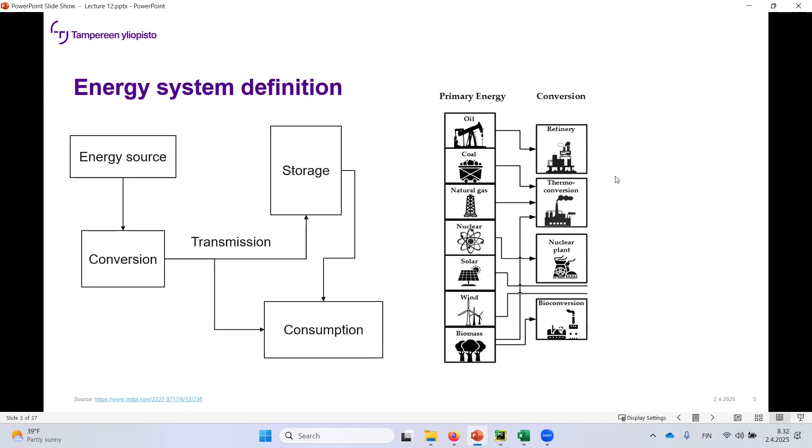In large-scale energy systems, you have the primary energy as fossil fuels, nuclear, solar, wind, and so forth, the biomass. You have the conversion plants, then the transmission and distribution, and the final energy is consumed by, for example, transportation, industrial sector, and residential.

So the overview of these key stakeholders in energy systems is that you firstly have the government and regulators. They are the ones to set the policies, give incentives to change the systems, and regulation related to carbon pricing or emission limits and so forth. That's the EU legislators and the national parties that adjust the laws and regulations.

Then you have the utilities and energy producers, the ones that provide the energy and also maintain the grid. So grid management, investment in renewables and market operations. They have to kind of take care of the system, uphold it in a way that, for example, Fingrid has a lot of this grid management, and the power plant or energy producers invest nowadays in a lot of these renewable power plants and so forth.

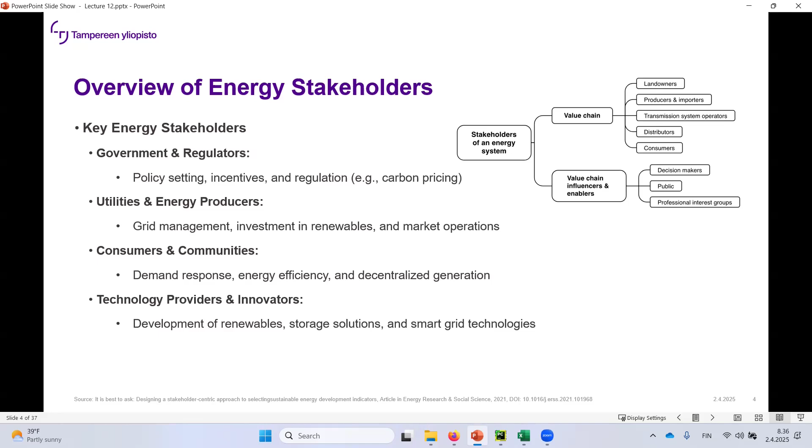There's also other ways to look at these stakeholders. For example, here is an example of taking into account how the value chain is related. So landowners are included here, consumers the same, distributors - these utilities and energy producers can be divided into different categories. There's transmission system operators, producers, and distributors as separate stakeholders, so you might get into a bit more detailed definitions through these value chains.

But if we look at this definition in a bit more thorough way - what's the role of government and regulators, for example, in the Finnish energy systems? The Energiavirasto and the Työ- ja elinkeinoministeriö, so the Ministry of Economic Affairs and Employment and the Energy Authority, they set policies, and the point of those policies is to balance economic growth with environmental targets.

So they have to be aware that we have long-running policies related to energy security, that we meet the demand, but also that we need to meet the environmental targets that are set by, for example, the EU. And they provide the incentives for increasing renewable energy sources, regulate market operations, and ensure energy security.

If we are investigating low renewable systems, these kinds of government parties and regulators have been focusing on maintaining stable supplies of traditional energy sources, so nuclear power and fossil fuels, and they have had well-established regulatory frameworks that have been supporting this centralized energy production.

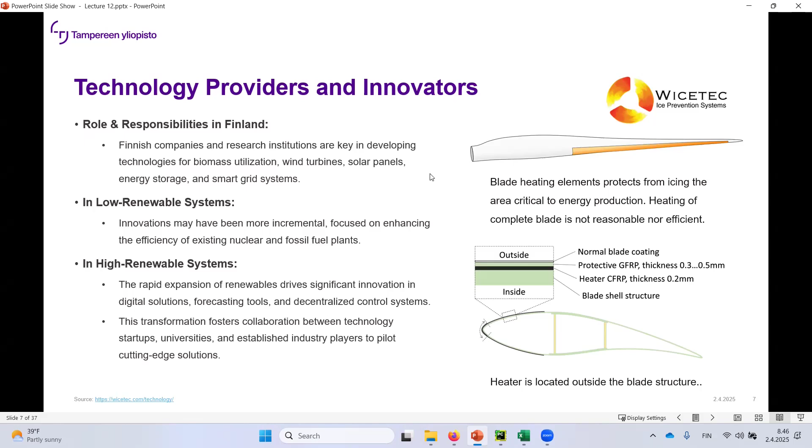Then there's the consumers and communities. In Finland, households and businesses are both energy consumers and increasingly so-called energy prosumers. A prosumer is kind of a previous consumer that has the ability to produce some of its own energy, and it can also provide it to the network as well, generating part of their own energy via rooftop solar or participating in demand response programs. We were talking about energy storage systems and these batteries that are being offered to Finnish households and these block houses.

And then there are larger energy communities, such as in Lempäälä. There's this larger energy community that, in case there was a kind of grid or system malfunction, could be to some extent at least self-sufficient. So they have battery energy storages, they have solar production, they have fuel cells, they have these gas engines, and there's a lot of infrastructure being built in Lempäälä related to this project. You can see it right around Idea Park, the solar fields, and we looked at the storage system in the lecture previously.

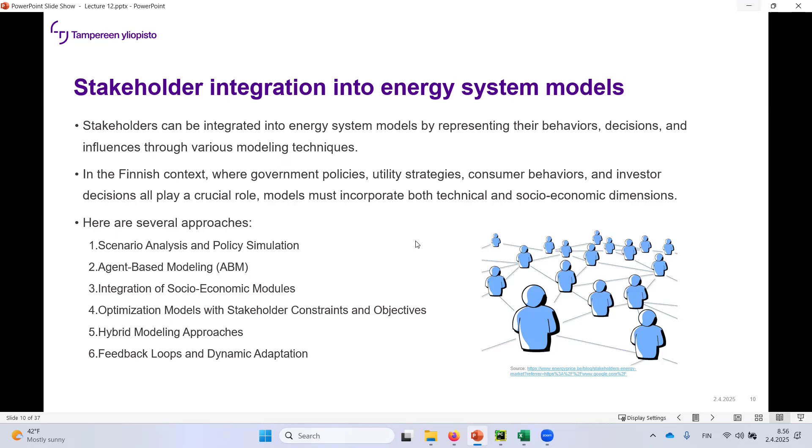Let's dive in and see what these actually mean. For scenario analysis and policy simulation, you can define multiple scenarios representing different policy choices. There can also be different regulatory frameworks and market conditions taken into consideration.

I promised module assignment 4 would be released already, but I've been having a lot of trouble generating a meaningful assignment for you. I'm thinking it might be related to this - there's a way of making different kinds of scenarios.

You can calculate how these scenarios affect the convergence of the energy system. By convergence, I mean that we are heading towards something, and what that something is going to be can be modeled. For example, a Markov chain can be applied here.

You'll have to determine a Markov chain matrix. The numbers behind it you can arbitrarily drop, as I've made in my example, but there's also something behind those numbers that you have to determine.

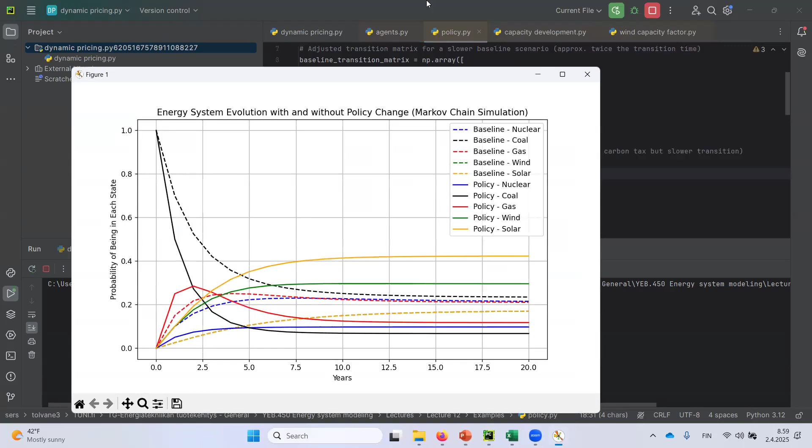All of these can be given a probability value, and this represents a certain kind of system, whereas if there's going to be a higher push towards renewable energy, we're going to emphasize more of these transfers towards renewable energy sources. If I run this scenario, it's going to give me a figure on how the energy production portfolio is going to develop.

This was a dummy calculation where we had 100% coal in the beginning.

And what's going to happen based on the two different scenarios, this baseline is going to converge into a certain level, whereas the higher renewable push is going to drive it downwards.

Since my background is in modeling chemical kinetics, this looks a bit like intermediate products from chemical kinetics calculations. So there's a certain species that peaks up as a kind of an intermediate product, so the gas power in this strongly policy-driven system peaks up high, but then it starts decreasing again.

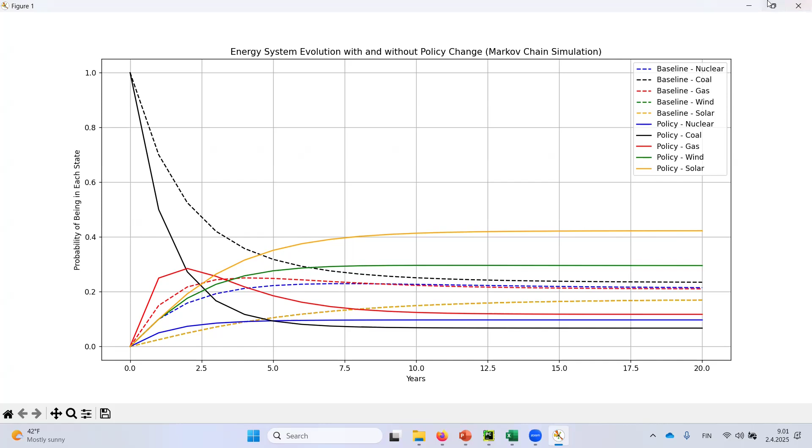So with these kinds of scenarios or with this Markov chain, you can analyze to some extent where the system is going, but the difficulty lies in determining these numbers.

So you have to be able to resolve the interdependencies of these various energy sources, and this is going to be somewhat on a general level. You cannot say it as with an accuracy of one single power plant, for example, it has to be on a general level. But there can be these trends that you can derive from the historical values and also the policy targets that are being set. So this kind of scenario analysis can be utilized to incorporate these policies.

So for Finland, you might simulate scenarios where the government introduces dynamic pricing, increased renewable subsidies, or stricter emission standards. And for example, to some extent you did this in module assignment 2, where I said Finland is acting as an island, and you had to make decisions on what energy sources to emphasize.

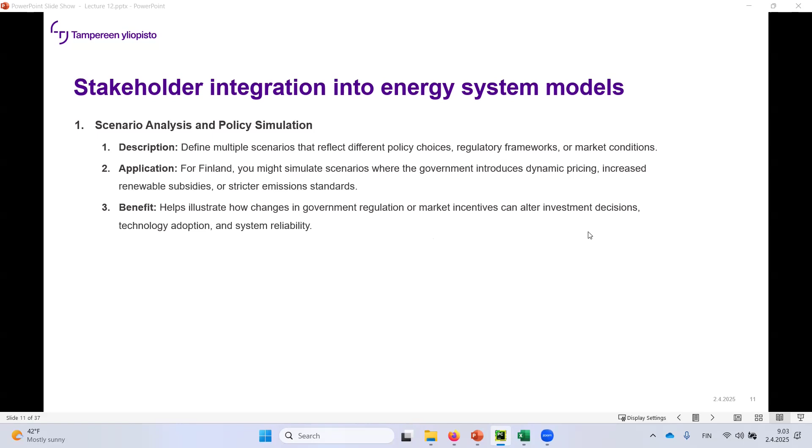Agent-based modeling. This models individual stakeholders, utilities, consumers, investors, as agents with distinct decision rules and interactions. So the interaction is the key in here. How do they interact? In a Finnish energy model, utilities could be modeled as agents optimizing grid operations under different renewable output, and consumers might be modeled to respond to real-time pricing signals.

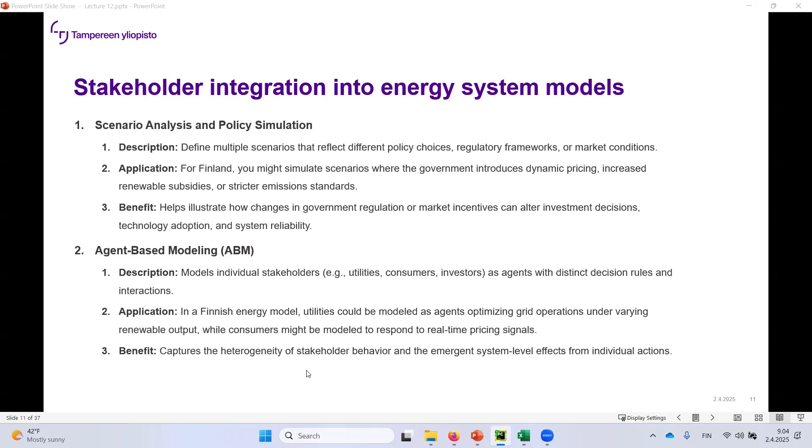So, for example, this pörssisähkö - when the price changes, the consumers respond. And this kind of modeling approach, when you have these agents, it captures the heterogeneity of stakeholder behavior and the emergent system-level effects from these individual actions.

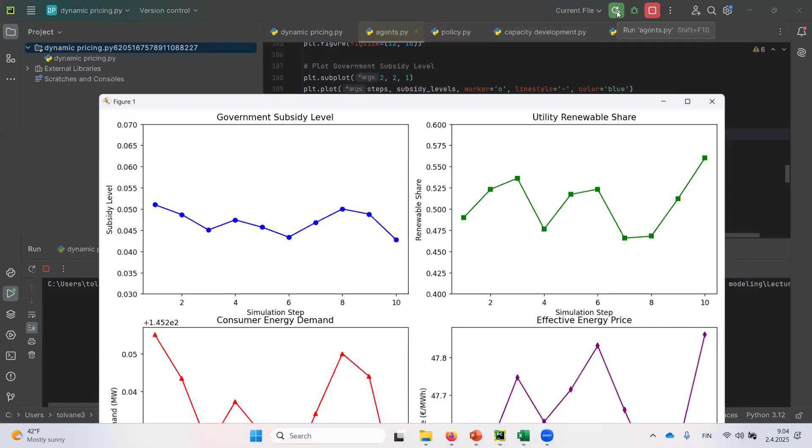And there is some kind of an agent-based model that I tried to generate as an example. So in here, what I have is a system where there's government, there's the utility, and then there's the consumers. The electricity price is the one that affects the consumers. The government regulates the subsidy levels, which to some extent affects the price and also the renewable share.

There's also some randomness in the utility renewable share, but whenever the government sees that the utility renewable share goes up, they are going to decrease the incentive. That's how the market works. But in this scenario there's multiple different calculation steps, so it kind of shows how these subsidies fluctuate. And to some extent this is actually what has happened in Finnish energy markets - at least in the last decade, there was some kind of bouncing action in the subsidy systems.

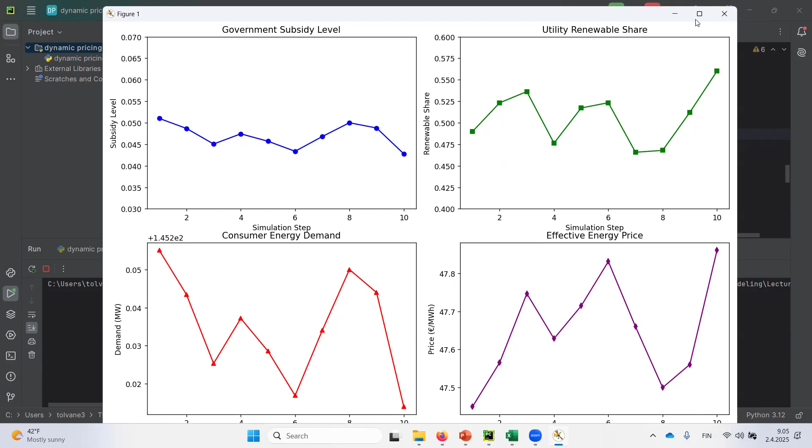And the consumers, whenever they see a higher energy price, they are going to decrease their consumption to some extent. But again, this is a rather arbitrary example.

And then there's the kind of interlinked interactions. So the government towards utility adjusts the subsidies, utilities to consumers provide the energy, government to consumer influences these prices through the subsidies, and utility to government reports the renewable share, so the government can make decisions based on the renewable share. So all of these agents have their own distinct behavior and effect on the energy system, and that's their interaction. I'm always trying to make these examples in a way that you could understand within the context and time frame of this lecture.

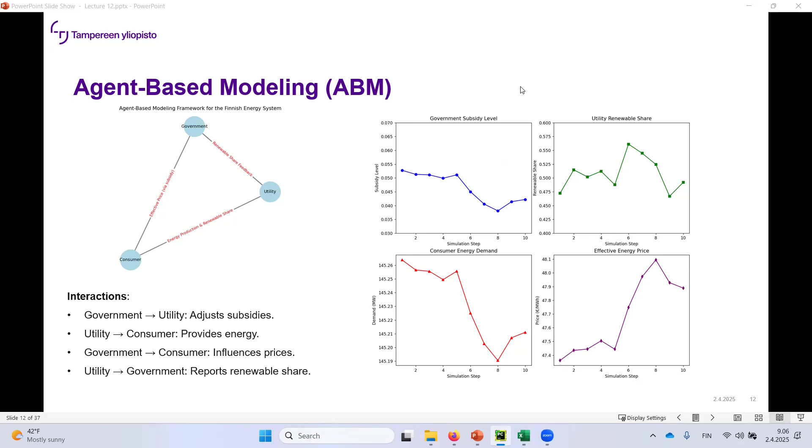So this isn't per se a very complicated example. The real agent-based models utilized in these energy system studies are much more complex, but this is just an example of that.

So, more stakeholder integration into energy system models - integration of socio-economic modules. You could couple technical models, so optimization or simulation models, with socio-economic components that account for example for market behavior, investment risks, and policy impacts. And in Finland this might involve integrating models of consumer demand response and investment decision frameworks for renewable projects. This has been done in the context of Finland.

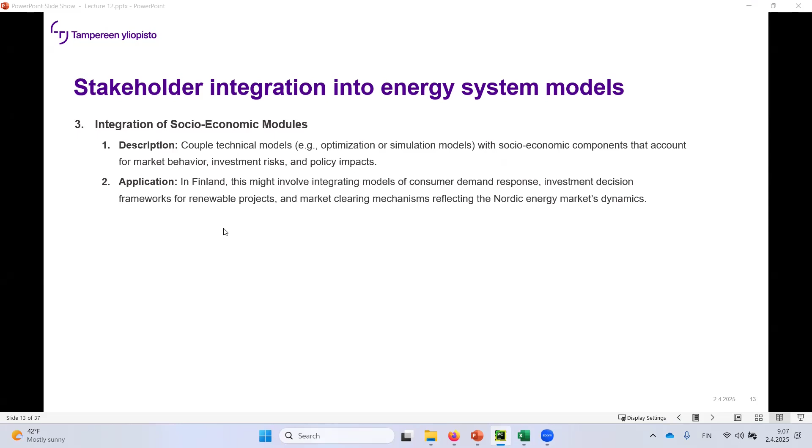And market clearing mechanisms reflecting the Nordic energy markets dynamics. This would provide a holistic view by linking technical performance with economic and behavioral factors.

Then there are optimization models with stakeholder constraints and objectives. Developing optimization frameworks where stakeholder objectives, such as minimizing costs, reducing emissions, or maximizing renewable share, are explicitly included as constraints. To some extent, we did this in the Excel exercise that I provided you with.

We did the Monte Carlo simulation to determine the battery size for the system. We minimized the usage of fossil fuels by introducing a battery into the so-called microgrid system earlier in this course.

For example, this optimization model for grid operation in Finland could include constraints on regulatory limits on emissions, incentive mechanisms for renewable energy, such as I showed in the agent-based modeling -- there's a subsidy that increases when the renewable energy share decreases -- or contractual obligations with consumers, where they have to be able to provide a certain amount of renewable energy to the consumers. Actually, energy companies have made this kind of contract with customers.

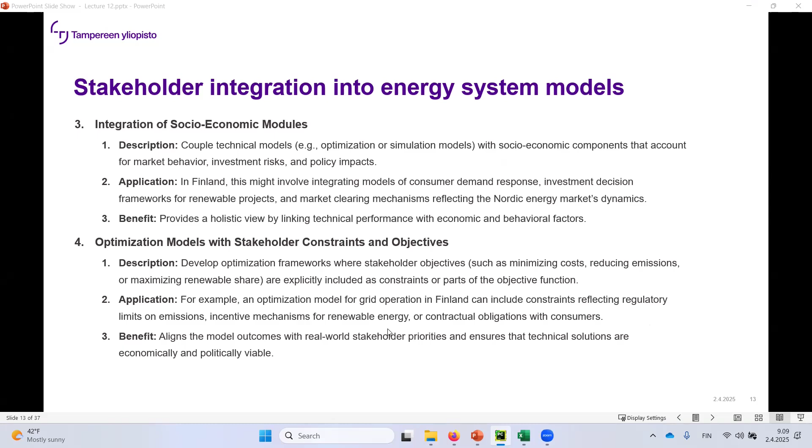What else? Hybrid modeling approaches combine deterministic simulation models with probabilistic elements that reflect uncertainties in stakeholder behavior, such as in market prices or consumer demand patterns. This consumer demand pattern is something we also modeled before, so you are somewhat familiar with this. An application of this could be using Monte Carlo simulation to incorporate uncertainties like fluctuating renewable output.

To some extent I guess we did this, but I'm still going to emphasize it one more time. In the exercises I want to utilize this Markov chain for wind power -- the wind capacity factor. There's an example of what I managed to do.

I first did it in Python, but then it looked like a black box again that you might not understand. But for wind, if you have the wind profile for a certain area, which you can get for example from the Copernicus database, now you have the skills to use that.

This Markov chain classifies the behavior of the wind, because if you want to make Monte Carlo simulations of wind production, you don't just want to make random numbers, because that's not how wind behaves. This Markov chain enables you to characterize the behavior based on changes in wind velocity.

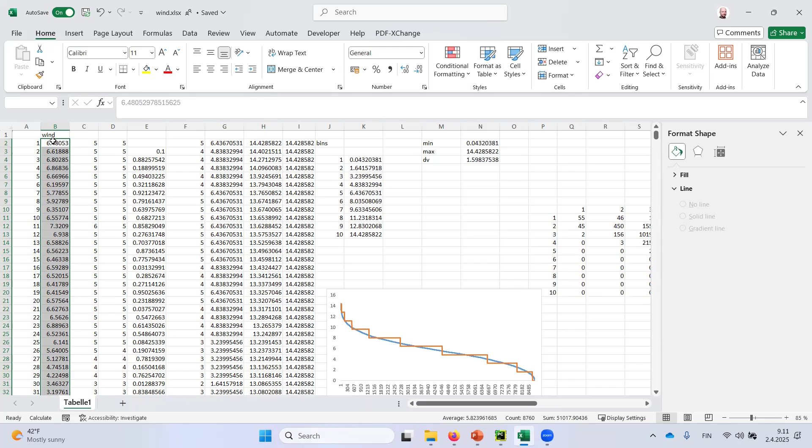Now we have an hourly resolution. So what I have done here is classify different classes of wind speed from minimum to maximum -- these are the different classes. Then I can say, oh, this is wind class number 5, and the next one is wind class number 5, so it stays the same. Here you can see from 5 to 6, and 6 to 5. So those are the possible changes.

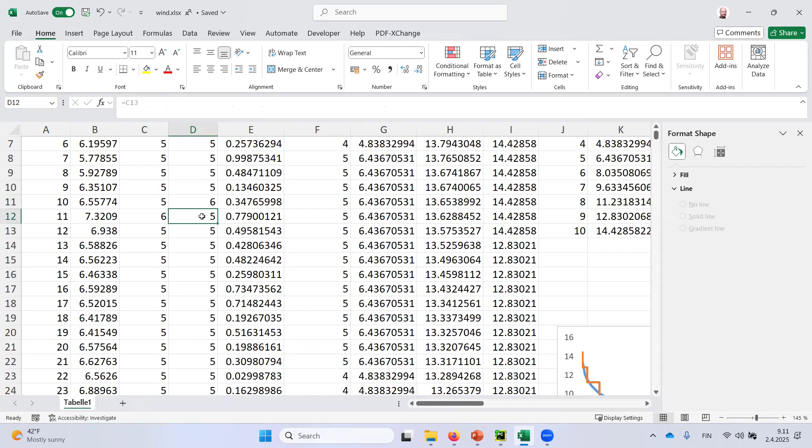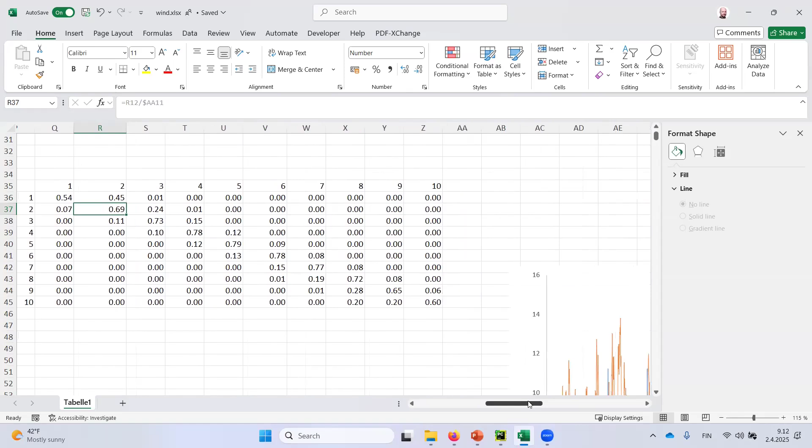So this Markov matrix enables you to see, for example, what is the probability of wind velocity class number 2 staying as class number 2 -- 69%. To move to class number 1 -- 7%. And to move, for example, to class number 7, making a crazy jump -- 0%. Now when I have this behavioral matrix, I can use this Markov chain to produce a novel wind profile.

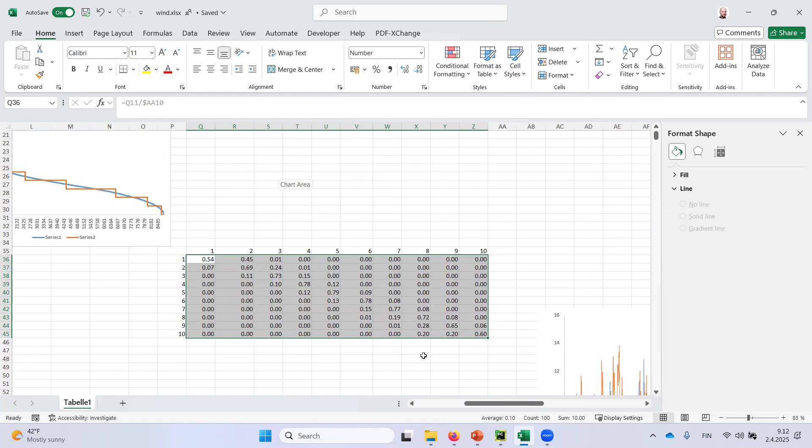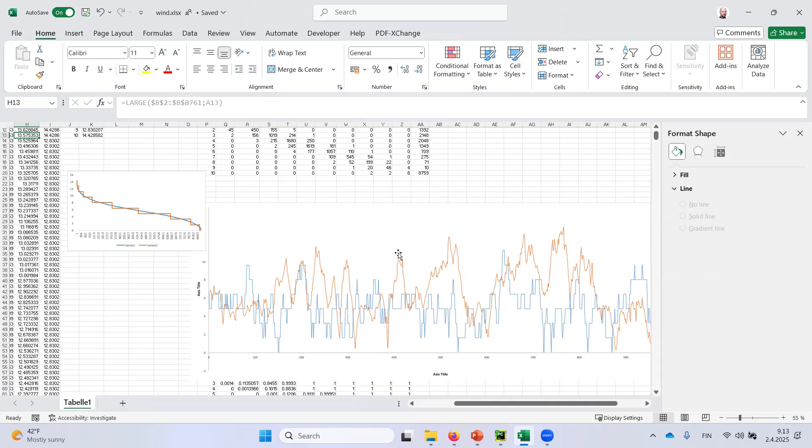You can see the colors are in reverse here -- the orange is the real wind, and you can see these discrete changes. I'm going to zoom in here a bit so you can see there's a fluctuation in the wind. Whenever I do this kind of randomization again, let's see if I can get it to work.

Now you see the profile changes. I have an infinite amount of profiles that really closely resemble the load duration curve. Now you can see the different classes because I have 10 classes. I made the load duration curve based on the Markov chain.

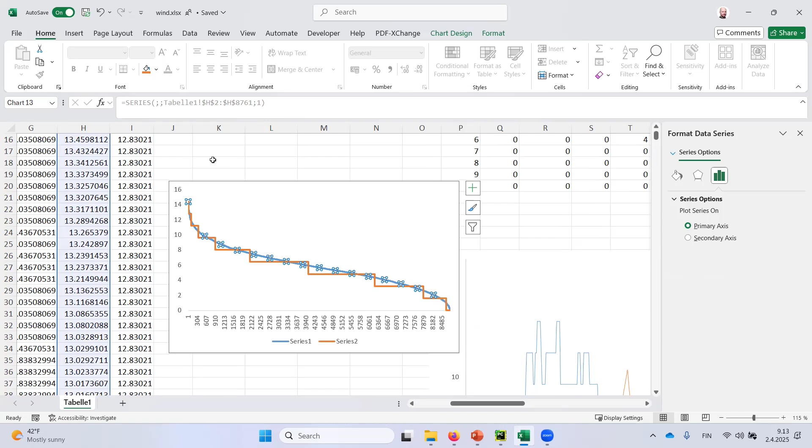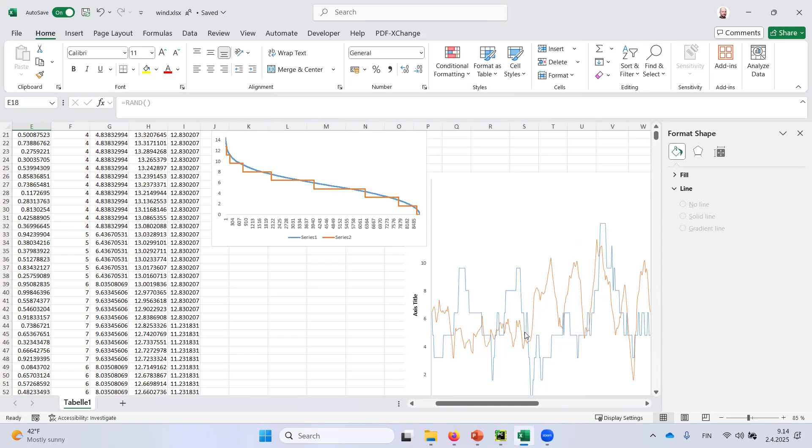Generated wind profile, so that's the blue one here. The colors are reversed here, and this is the actual one. So now you can see we have wind profiles that really well characterize what's happening in the real world, but there's a possibility of making time series that provide wind at certain times where in reality there wouldn't be wind, and vice versa.

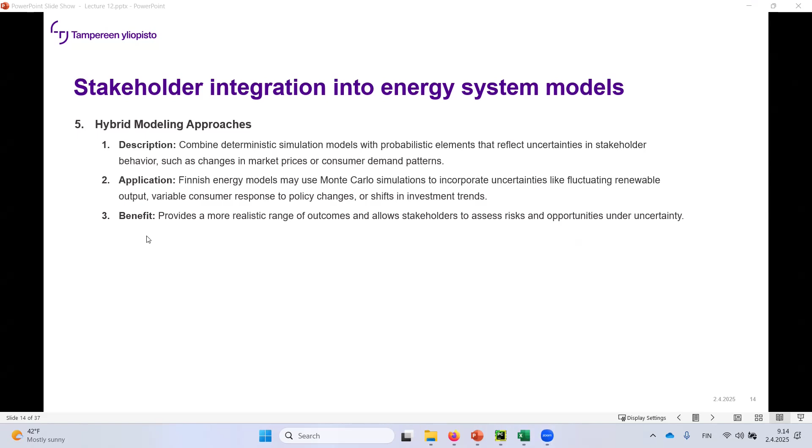So that's about the hybrid model approaches, and then there are these feedback loops and dynamic adaptation, implementation of dynamic feedback mechanisms where stakeholder decisions affect system performance. I think this was seen to some extent in the agent-based modeling, where there are feedback mechanisms where utilities report their renewable amount, and one stakeholder, the government, adjusts subsidies based on that. So to some extent you've been using these different stakeholder integration methods, but it's beneficial to categorize them also.

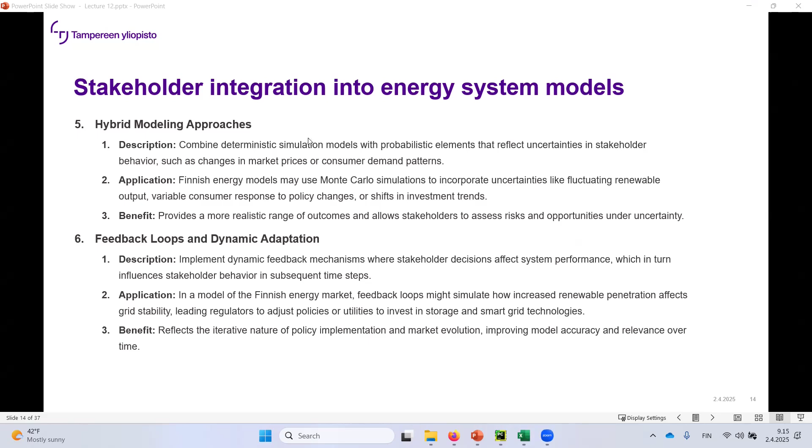So what kind of control measures are being used in energy systems? There are market mechanisms. These control measures and market mechanisms are the two components in the management and optimization of energy systems nowadays, and they have to work together to make the grid stable, reliable, and economically efficient.

That's the trilemma of energy systems. You could make it reliable, you could make it cheap, you could make it environmentally friendly, and you can only choose two of those. So how do you balance between those three?

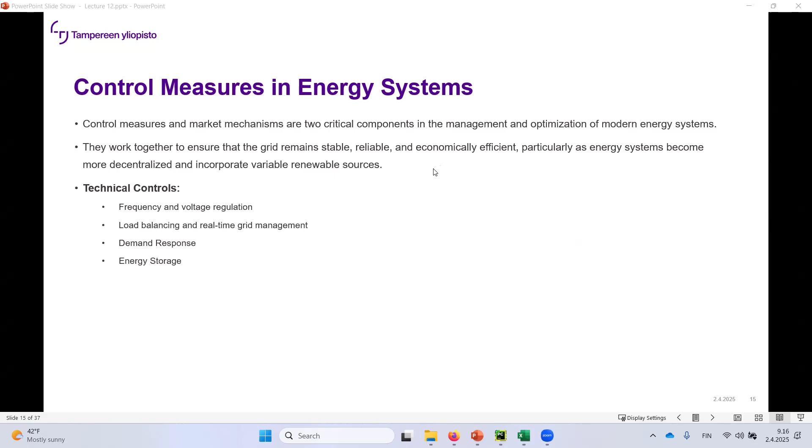What kind of control measures can be utilized? There are technical controls and market and regulatory controls. Technical controls, for example, relate to frequency and voltage regulation in the electricity grid. You can have such technical controls for the district heating system, and for gas transmission networks, but they aren't related to frequency and voltage regulation—they have their own characteristics.

For example, you can think of energy storages as a technical control measure, and demand response. Market and regulatory controls include dynamic pricing and time-of-use tariffs—in essence this could just be pörssisähkö, the market priced electricity. There are also capacity markets, auxiliary and ancillary service markets, subsidies, incentives, taxation, and integration with energy storage and demand response.

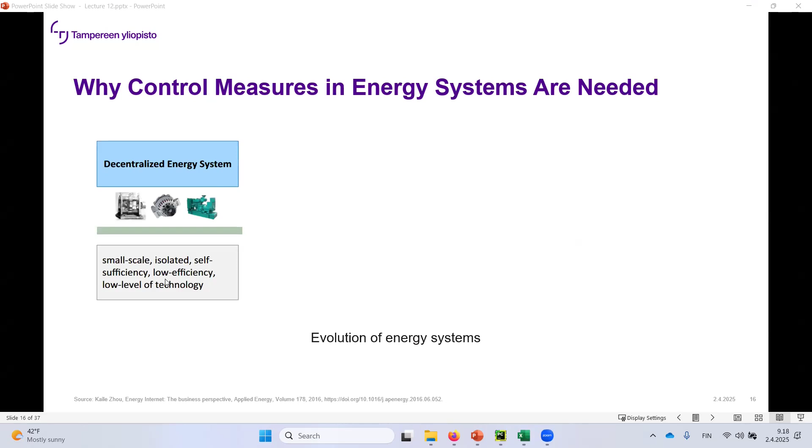These control measures in energy systems are needed because we are moving from early decentralized systems—small scale, isolated, self-sufficient, low efficiency, low level technology—which was around the 19th and early 20th century, toward a centralized energy system with highly industrialized production at a larger scale, and then toward a distributed energy system.

That's what's been happening now: diversified, small range, renewable, clean, flexible, low emissions. But what we need to move towards further is the smart and controlled energy system—smart, interconnected, which is where sectoral integration comes into play, digitalized, data-rich, with the Internet of Things and big data, or as I like to call it, big and messy data, and high efficiency.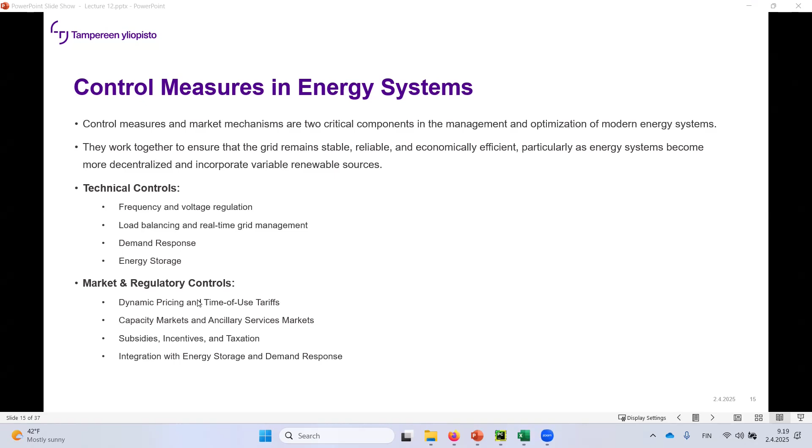Personalized—that's why we need technical controls and market and regulatory controls, because we're moving towards a system that's highly, let's not say chaotic, but that's what it would become without control measures. Technical control measures are real-time measures that help maintain the balance between supply and demand in the electricity network. Frequency regulation ensures that the frequency, 50 hertz, stays within the wanted limits, plus or minus 0.1 hertz.

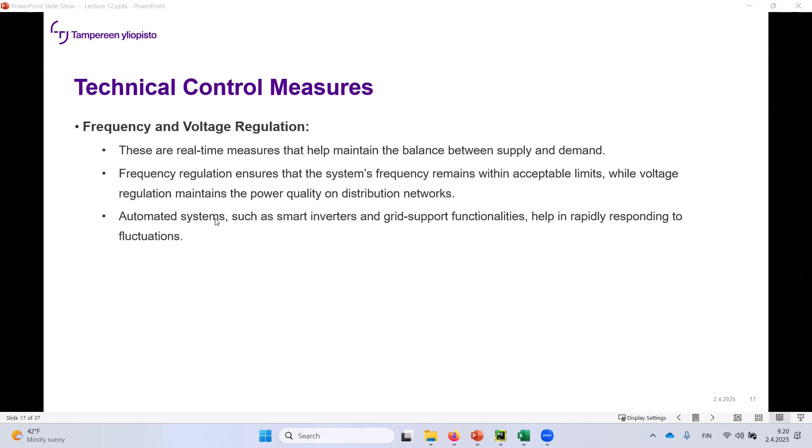These are automated systems, and there's legislation and regulation concerning frequency and voltage regulation. Then there's the load balancing and real-time grid management, so grid operators use this control system.

I put a link to this SCADA system, so you can see what it means - supervisory control and data acquisition. A key attribute of SCADA is its ability to perform supervisory operations over a variety of proprietary devices, with certain levels this system can go through.

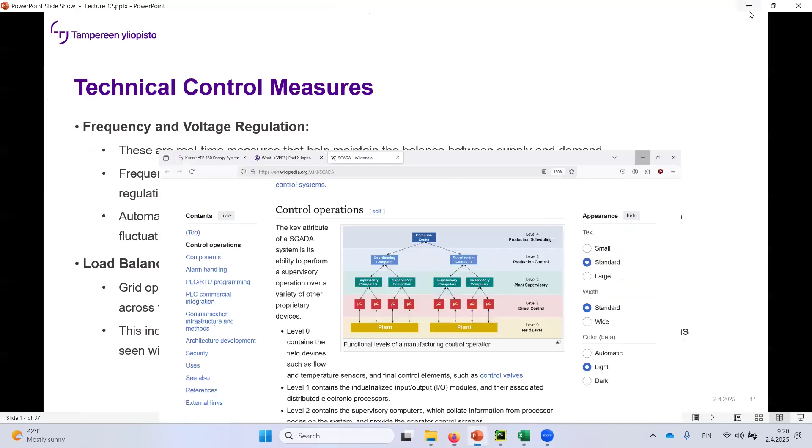This includes managing these kinds of ramp rates of power plants in the electricity system to respond to sudden changes in demand or supply.

I'm talking mainly about the electricity system here because in this smart and connected energy system, the heart of it is the electricity system, because that's the fastest one to respond. There's the largest amount of data, and it has to maintain balance, unlike at a second level, such as the distributed or district heating systems.

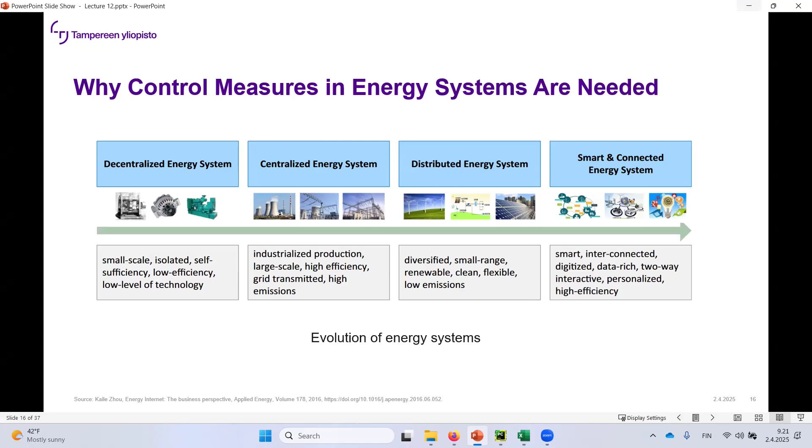District heating systems are isolated from one another, but electricity systems are highly interconnected, and they have the highest need for resolution in terms of balancing it out. That's why we have a lot of these mechanisms related to control in the electricity system.

These are the reserve marketplaces in Finland and what they do. There's, for example, fast frequency reserve, which responds in seconds. Then there's the minute scale, 5-minute scale, and 15-minute scale kinds of restoration services in the grid.

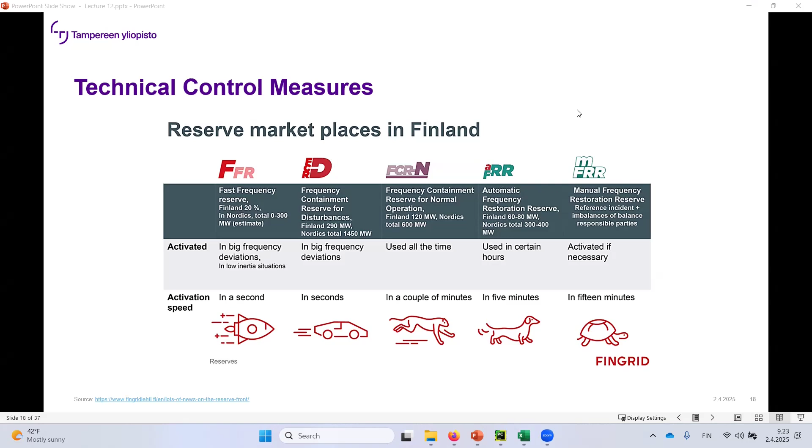So there's a lot of these reserve marketplaces, and they have been increasingly utilized in or examined in master's theses nowadays - how to make profit out of this. If we have a system, can it operate under these markets and get possible revenue out of it?

These demand response programs allow consumers to adjust their electricity usage in response to grid conditions or price signals, and this can be done in an automated way. The electricity company can provide a service in which they control, for example, certain parts of your heating system and so forth. Automated systems or manual interventions can reduce consumption temporarily.

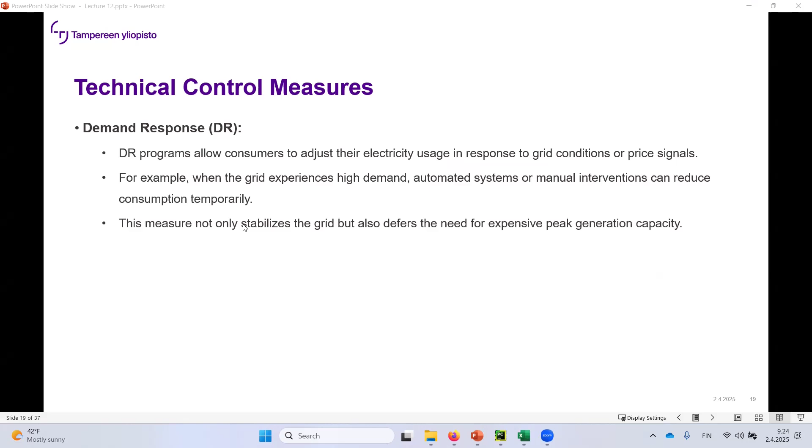Then there's energy storage as a control tool - something you're more familiar with since we already had the lecture on this. Storage systems can absorb excess energy during low demand periods and release it during high demand periods.

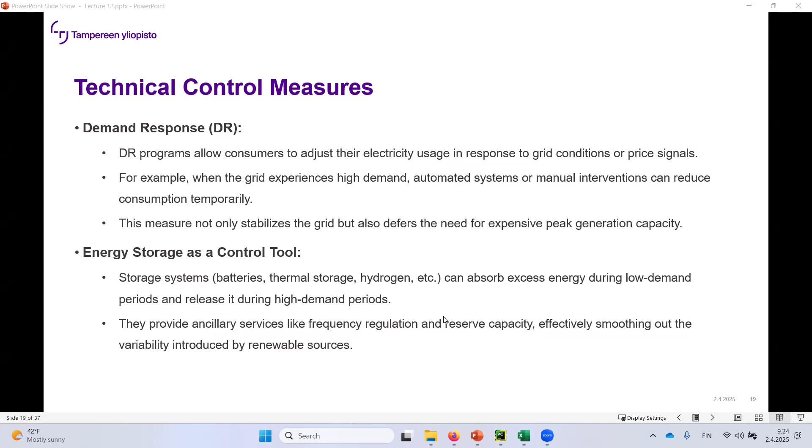So there's a lot of different services that can be utilized to balance this network. When talking about demand response to customers, for example, Helen provides this kind of service - you can go into this website to see.

Okay, there seems to be a lot of trouble with this Zoom system now. Just going to check that my recording is on. Yeah, sorry for the trouble, I'm not sure why this wants to quit all the time.

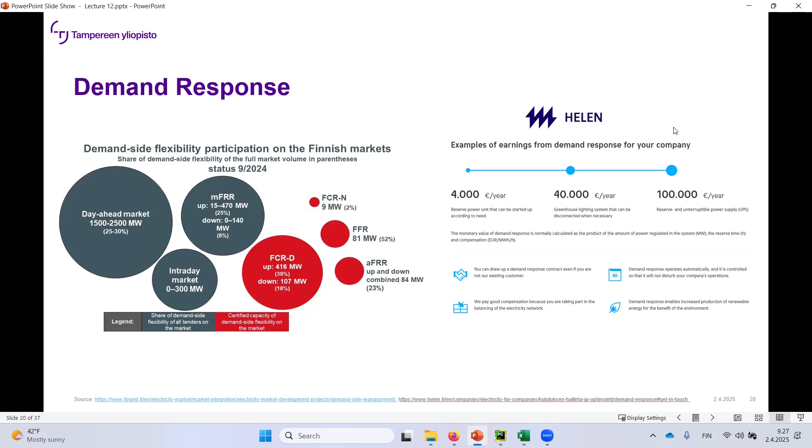Then there is this dynamic pricing, and this was a bit of a pickle since a lot of the literature referred to this dynamic pricing as being the same as time of use tariffs. But the way I understand it, time of use tariffs means, for example, this pörssisähkö, the market price-based electricity contract, so you know the prices in advance. But there might be some difference between the consumption prediction for tomorrow and the realized consumption of tomorrow, so that's why the price of production actually changes.

If there were some mechanism so consumers could see the real-time price, they would be able to adjust their systems accordingly, or it would have to be done automatically. Otherwise it would be a really up and down bouncing system. So we'll see an example of these dynamic prices, which incentivize consumers to shift their usage to off-peak times, especially when the prediction of consumption and production goes wrong, for example in the case of wind power.

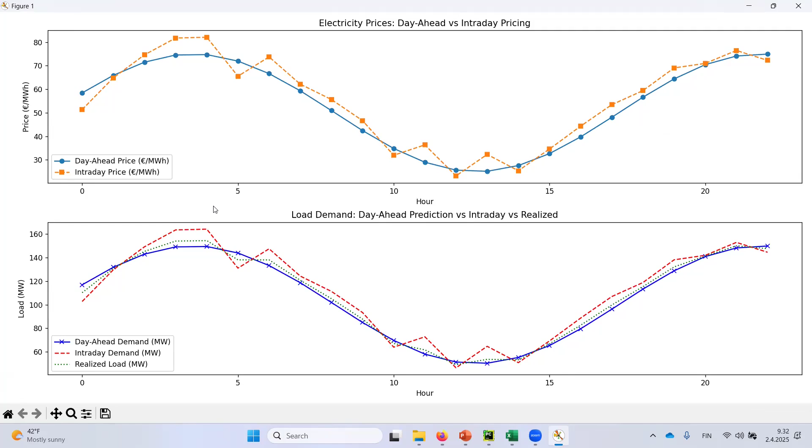Based on this load profile there's also the price profile - less consumption, less price. But now since there is fluctuation in the demand, it causes fluctuation in the marginal price of production. Due to this dynamic pricing, some of the customers will adjust their consumption based on the actual current price, which will drive this red curve towards the blue one - that's the green curve in here. So it levels out the fluctuations.

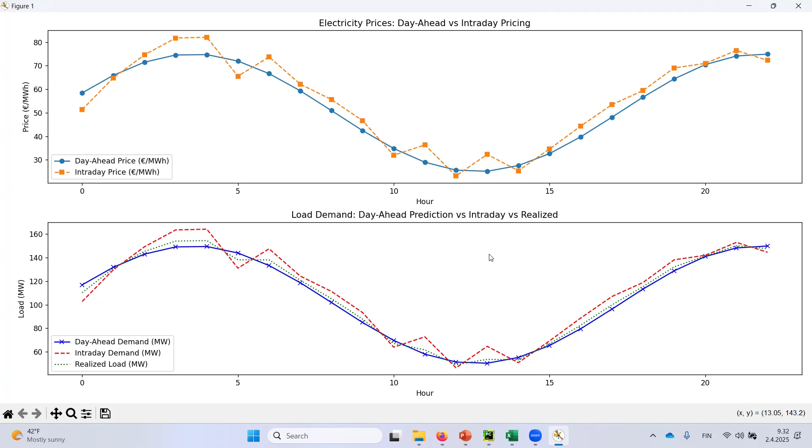But that's not a system that's being offered now, and it would have to be automated in a sense, otherwise it would be really chaotic. So that's dynamic pricing and time of use tariffs.

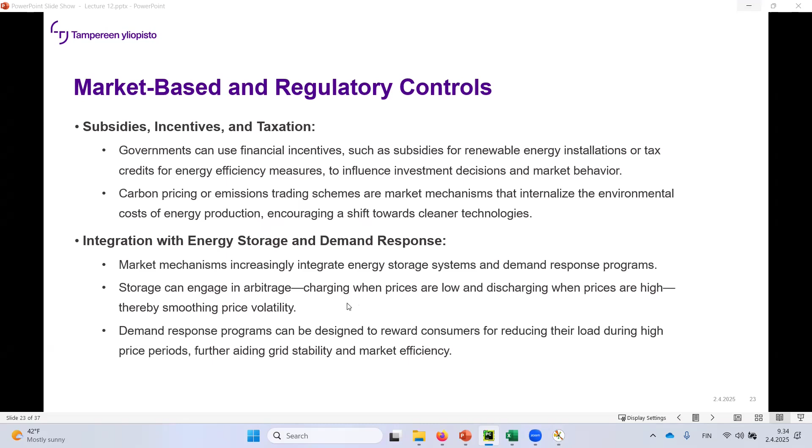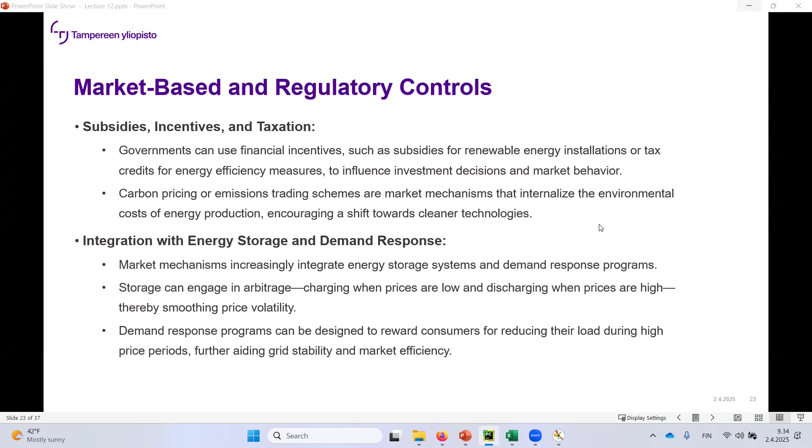Then for market-based and regulatory controls, one aspect is subsidies and incentives, taxation. Governments and EU legislators can use financial incentives such as subsidies for renewable energy installation or tax credits for energy efficiency measures, to influence investment decisions and market behavior. Then there's integration with energy storage and demand response, which you're more familiar with - the arbitrage, where you load up the energy storage system when there's a low price and utilize it when there's a high price. That levels out the system's fluctuation in terms of both demand, consumption, and price.

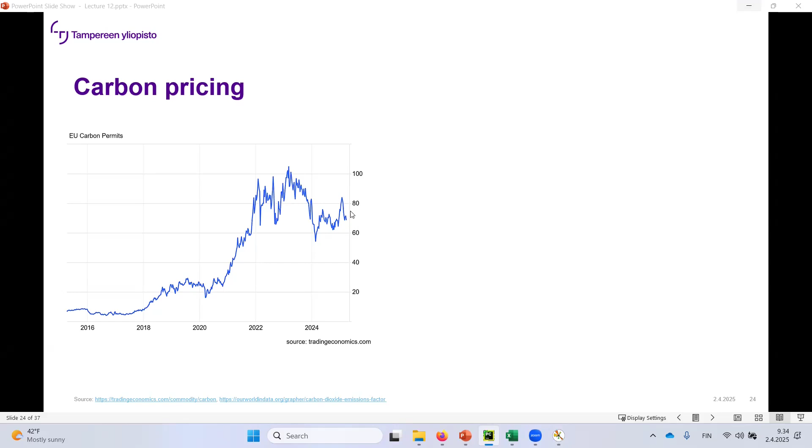Related to this taxation, you have carbon pricing. The CO2 price has gone soaring upwards during the early 2020s, and now it's been fluctuating at a level of approximately 70 to 75 euros per ton of CO2. Then there are the carbon dioxide emission factors that, in cooperation with this carbon pricing, are set for certain fuels - they drive the system away from these highly carbon dioxide intensive production methods or fuels.

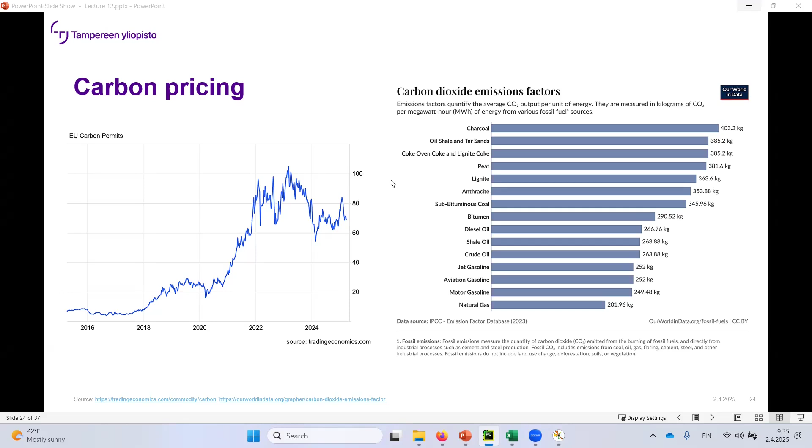So you can see that natural gas most likely is going to be, or would have been, the kind of intermediate solution for our energy system decarbonization. But due to the ongoing war, the future of natural gas is a bit unsure.

And then the incentives, what kind of incentives have been put into place? In essence, for example, in the Markov chain matrix, in this policy, you would have to adjust these. How likely is it that coal will be replaced with wind? Well, it's going to be much more likely if you have incentives.

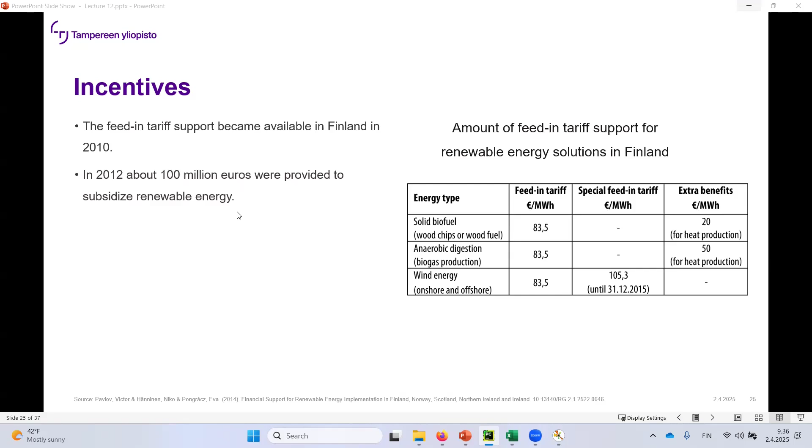And that was the kind of initial path of this Finnish wind power generation or evolution. So this feed-in tariff became available in Finland in 2010, and approximately 100 million euros were provided to subsidize renewable energy: solid biofuel, so wood chips and wood fuel, anaerobic digestion related to biogas production, and wind energy. This was the one that started growing the fastest, making it profitable for this novel type of renewable power source to break through into the markets.

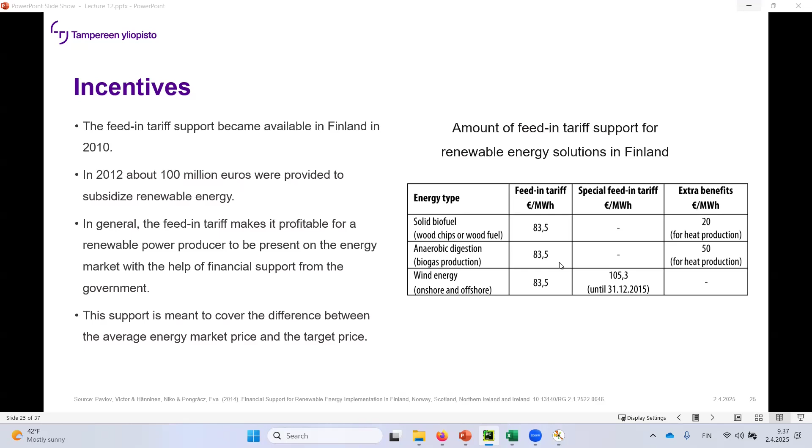But then in 2017, the system was full, at around 2,500 megawatts. Part of them are still receiving this support, so feed-in tariff is still active in Finland, but there are no new participants that can enter the system, at least in terms of wind power. If there's some novel new system, for example hydrogen production, in the future it might get some incentives as well.

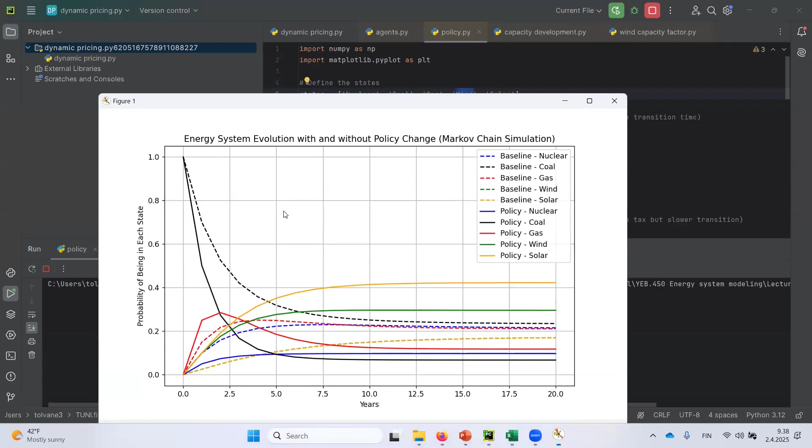While these technical control measures operate in real time to manage grid stability, market mechanisms provide longer term economic signals. Demand response would be a way to balance the system within 15 minutes or within the hour, but market mechanisms are something you have to go through to see what happens to the system in the long run, in 20 years, where it's going to level off to. Those numbers in the Markov matrix would change every year, so they would be varying also.

Dynamic pricing, for example, not only encourages consumers to shift load in real time, but also signals investors on the potential profitability of energy storage and demand response technologies. So in that sense it's a long-term solution also. Both aspects contribute to the overall flexibility of the energy system, the ability to withstand fluctuations in renewable power production and in consumption.

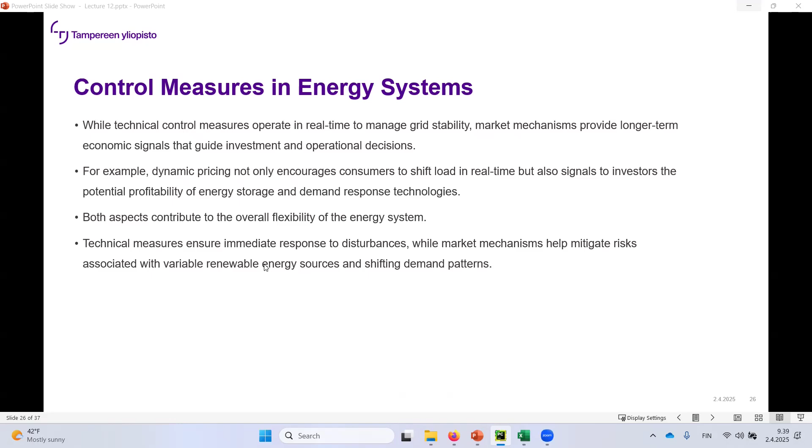Flexibility can also mean that, well, resilience is a bit more of a long-term goal, but it goes hand in hand with flexibility. For example, this wartime has affected the Finnish energy system and tested our resilience. Technical measures ensure immediate response to disturbances, while market mechanisms tackle these long-term goals, and they have to be integrated effectively, otherwise they won't make too much of a difference. This integration is the way to decarbonize the energy system.

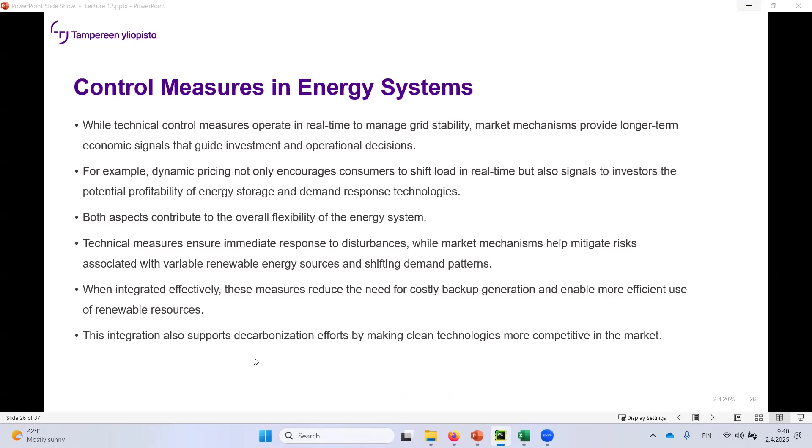Something about the policy framework still. We went through what kind of stakeholders are in the energy systems, how to integrate them into the models, and what kind of control mechanisms, technical and market mechanisms, affect the energy system, and to some extent how they can be implemented into the models. And then these policy frameworks, what do they mean?

They include the set of laws, regulations, incentives, and market mechanisms designed by governments and regulatory bodies, for example in the EU, to guide energy production, transmission, distribution, and consumption towards the carbon neutrality goal we are now going towards. They typically contain regulatory measures, such as standards for emissions, efficiency, and safety, which are the cornerstone of reliable grid operation. Then there are incentives and subsidies that we just saw: financial supports, tax credits, feed-in tariffs, grants to encourage investment in low carbon energy sources. And then market-based influences like carbon pricing, emission trading schemes, and dynamic pricing models.

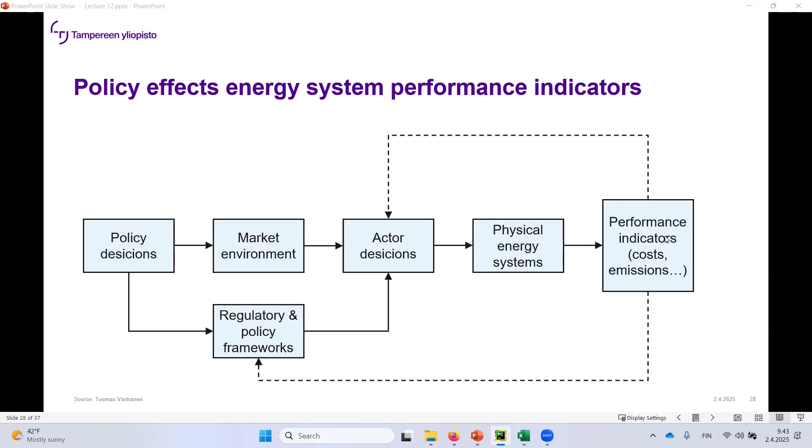Also these performance indicators, if there's high emissions, for example, they are going to be met with some stricter legislation, and then it's going to trickle down to the actor decisions, physical energy system changes, and then it shows in the performance indicators. So that's the route the change has to travel.

And then there's also the public opinion, and that affects these policy decisions and actor decisions. Also, if you have a lot of smoke in the air, that's the Kuznets curve, then it's going to start affecting the public opinion, and the public opinion shifts in the long term what's going to be happening in our energy system.

So the state of the energy system, or the energy system in itself, is such as the public accepts. If there's going to be some kind of turmoil in the system, then the public opinion is going to start shifting, and then you're going to see some changes through these policy decisions. But as you can understand, that's a long route, it's going to take years to change the energy system.

So now what we put into action through this public opinion and these policy decisions, it's going to affect a long time, and you better be damn sure that it goes in the direction that you actually want it to go.

And in here, talking about these regulatory and policy frameworks, this is the European Climate Law related to this Fit for 55. So 55% net emissions cut by 2030 compared to 1990, climate neutrality by 2050. There's a ton of these different laws and regulations that determine in which ways we are going to transform the energy system.

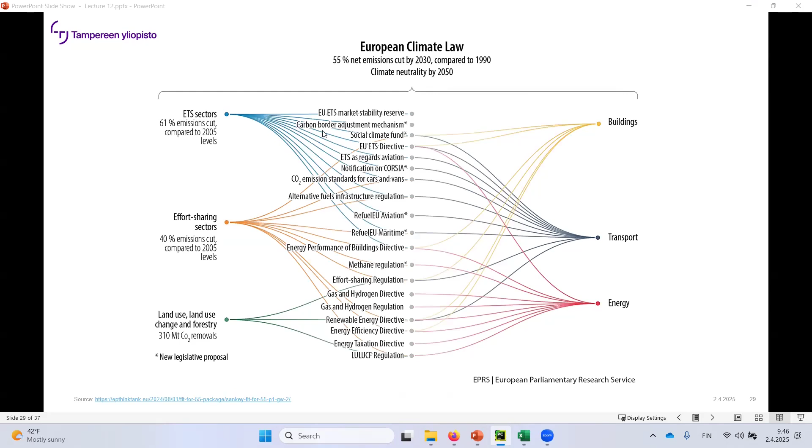A good example is the SECA, sulfur emission control areas, that in the maritime industry, you have to change from high sulfur fuels to, for example, natural gas, or you're going to have a scrubber. That happened a few years ago, when a lot of the ships sailing in international seas started to require these scrubbing systems, and that's when the technology innovators and providers came into play. But yeah, this is just to show that there's a lot of legislation to take into account.

So the impacts of these policy frameworks on energy system modeling and operation, they have several different and indirect impacts on this energy system. Investment and technology adoption: you have clear policy signals to reduce uncertainty, encouraging private investments in renewable storage and grid modernization, for risk reduction.

Innovation incentives: grants and subsidies drive technological advancement and integration of smart grid solutions. For example, with the sulfur emissions, this just mandates that you have to reduce them, and then it drives the technological advancement through this obligation, mandation.

Then transition support: policies promoting renewable portfolio standards and decarbonization help shift energy mixes away from fossil fuels, and again, then you're going to have to change these numbers. So there's a lot of information in these. These are rather arbitrary numbers generated by AI, but it goes in the right direction. But to see that it actually is going in the direction that we want, we need those models.

Then there's the operational market dynamics. What are the impacts of these policy changes or frameworks on energy system modeling and operations? You have to have grid stability, so regulations on frequency and voltage standards, coupled with market mechanisms like capacity markets, which Finland doesn't have, ensure that energy systems remain stable. That's why we're going to see this, the power reserve, tehoreservi, that we have. We have to have a stable energy system in times of turmoil.

Cost allocation, carbon pricing and emission trading schemes shift the cost of externalities to producers, influencing dispatch decisions and operational strategies. You're seeing that different energy systems and networks are moving away from carbon fuels. There's more and more taxation and mandation pushing the shift towards renewables. When renewables emerge, with the help of this course you're going to know what it also needs: regulatory systems, for example energy storages.

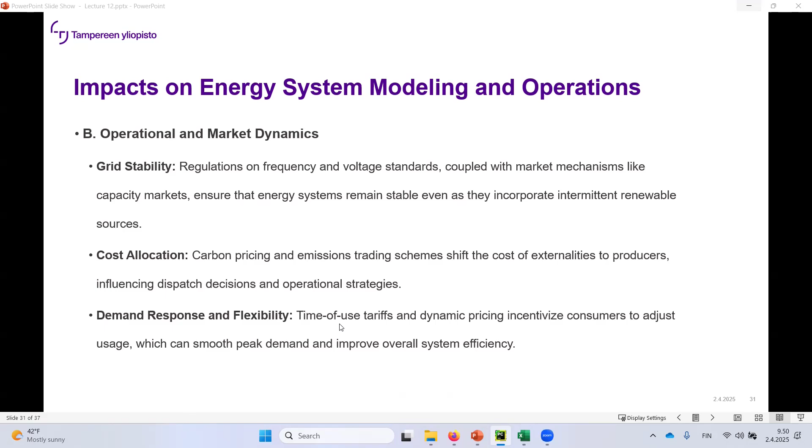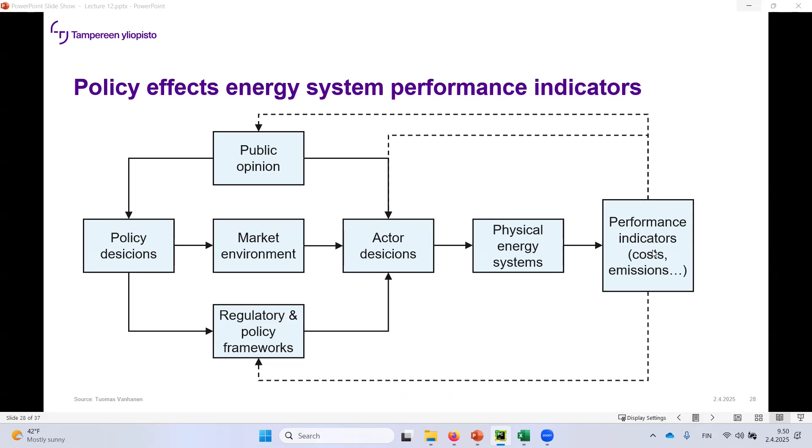Demand response and flexibility: time of use tariffs and dynamic pricing incentivize consumers to adjust usage, which can affect grid stability. These regulatory and policy frameworks can affect actor decisions in a way that we're going to have physical energy systems that can manage this demand response, and then it's going to show in the performance indicators, we're going to have lower or at least more stable costs.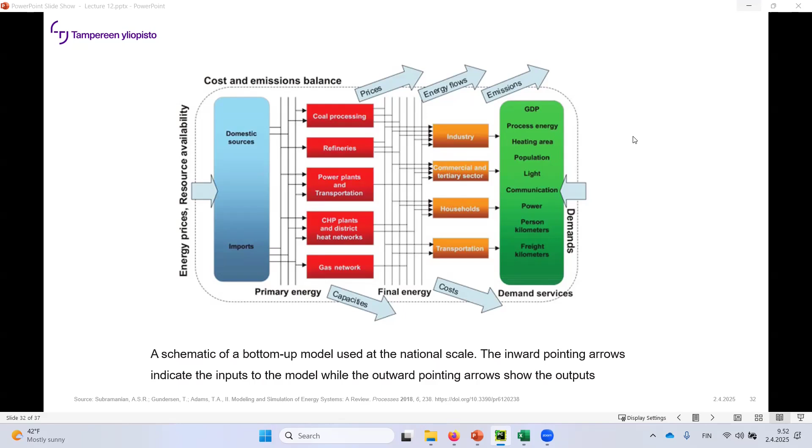The final effect of these policy frameworks is integration into energy system modeling. So how can you integrate these policies into this modeling? Modeling different policy scenarios, such as aggressive renewable targets versus gradual transition - that's what I was trying to show in this policy modeling. And again, the devil is in the detail.

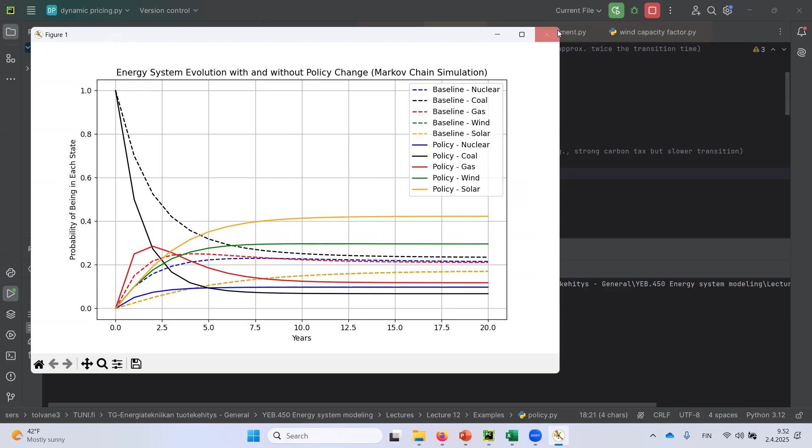Now you can see the arbitrary outcome of this arbitrary system, and you would have to be the one that digs up the data - how fast, or rather how probable it is that we are shifting from coal to nuclear, how probable it is that we are shifting from coal to biomass.

So you have to have these scenarios, constraint modeling. This is something that, in my opinion, is easier: incorporating policy-driven constraints like emission caps or renewable mandates into optimization models that help simulate real-world operational challenges and investments. Emission caps, renewable mandates, or sulfur oxide emission control systems are good examples.

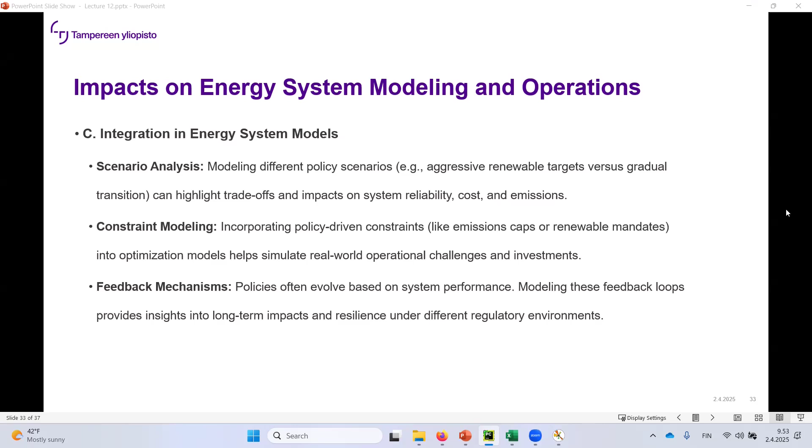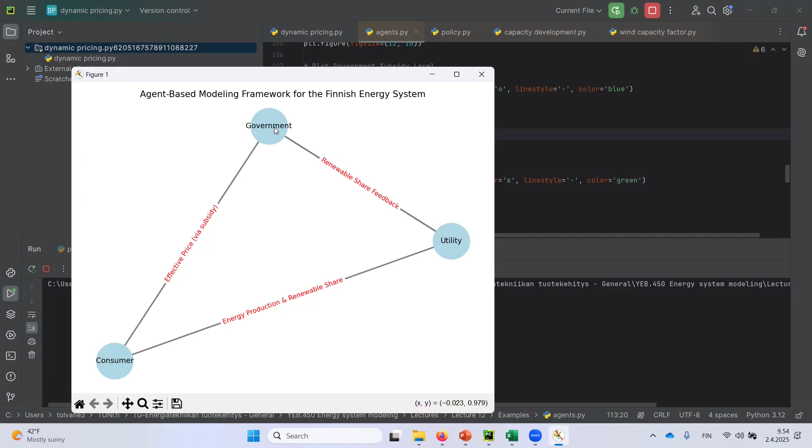Then there's the feedback mechanisms - policies often evolve based on system performance, so you always have to have a certain kind of feedback. You have to have measurement in the models, and then based on the measurement, you have to be able to make changes. In agent-based modeling, for example, the utility changes the renewable amount, then gives that as feedback, the government changes the subsidy levels - that's the interaction of different agents through feedback mechanisms.

In essence, in this course I've tried to show that we have been moving across this kind of a board.

So to understand energy systems, you have to be able to understand and make at least some kind of calculations on this unit or at least this plant level. And then there's the kind of supply chains that we have been going through, such as electricity supply, electricity transmission, distribution of district heating and gas networks, and then the larger scale energy models where energy economics is taken into account.

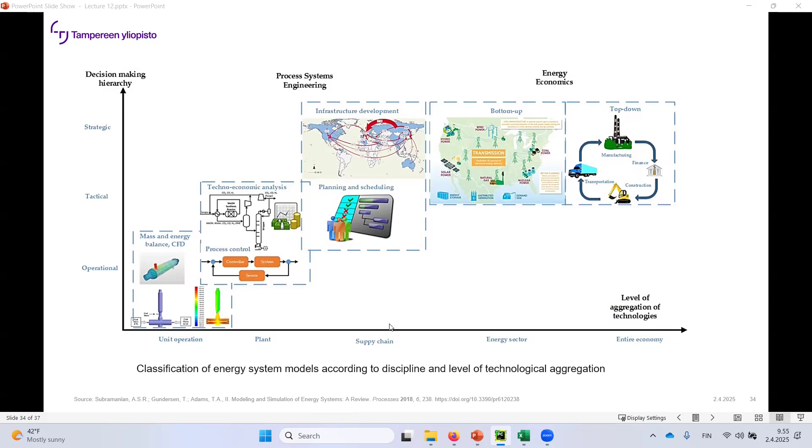In my opinion, this is a really good figure that I found from the article I've referred to before, modeling and simulation of energy systems, this review article. Actually, this is what I've drawn before for our energy and process engineering studies at Tampere University, since we are the energy and process engineering major.

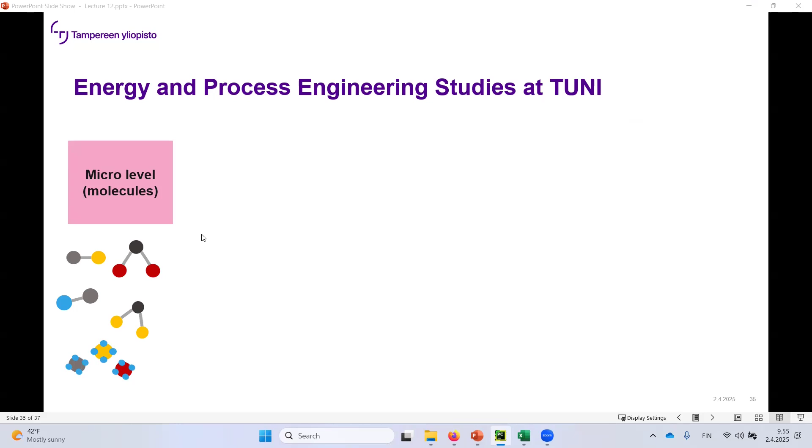So what we are teaching is the micro level. We start from the molecules, the kinetic gas theory, for example, how different molecular structures affect things like heat capacities. Then you go into the phenomenon level, so thermodynamics - how does pressure affect a certain system, how does temperature affect a certain system?

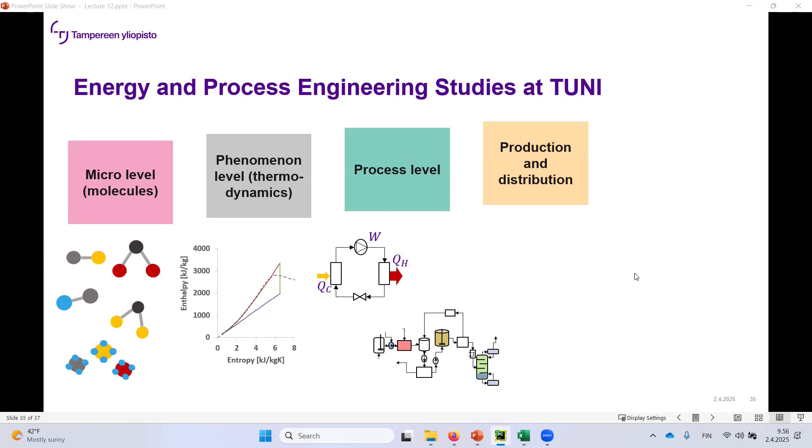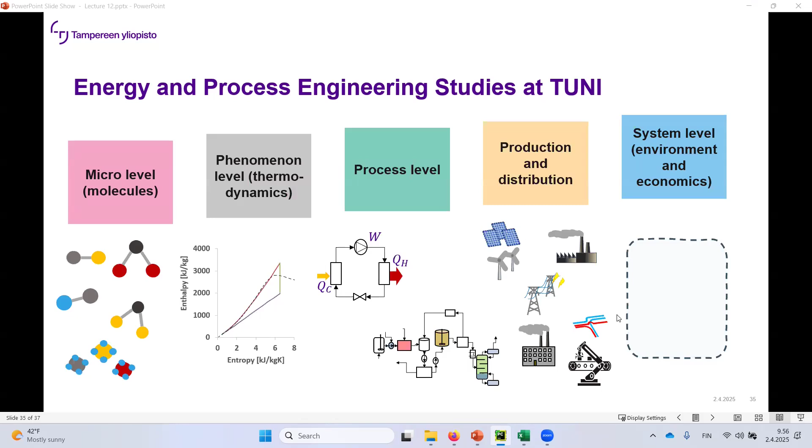Then you go into the process level. You have these unit processes, and then you chain them up to more complex systems. Then you go into production and distribution systems, and then you have the system level - that's the overall energy system, with the interlinkings of those systems, the sectoral integration that we've been talking about.

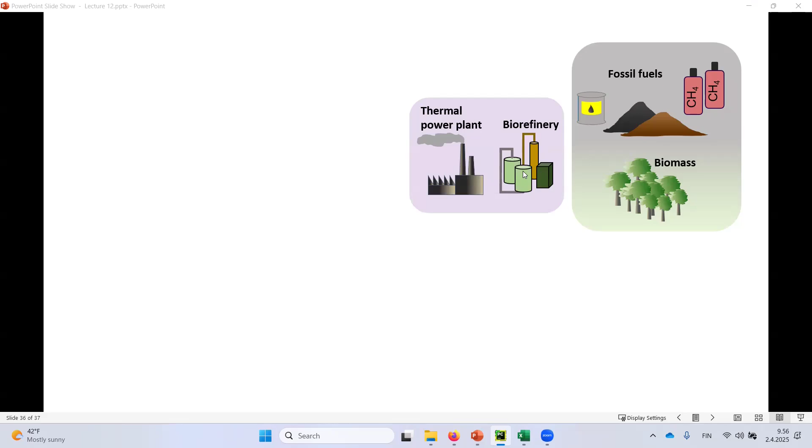So we have the traditional fuel or energy providers, and then we have the consumers via the electrical grid and district heating, for example. And this is the traditional way. And then you go to the electricity market.

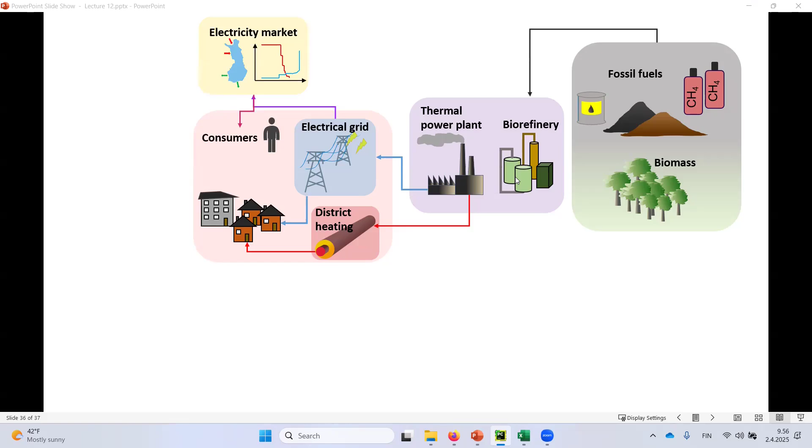But due to the fact that we have renewable energy and energy storages nowadays, it causes fluctuation. So the customers are being turned into these prosumers, production and consumption altogether. So the money is what matters for the consumers - we have to incentivize them to make these smart decisions. Then sectoral integration, heat pumps, electric boilers come into play and mix up the system.

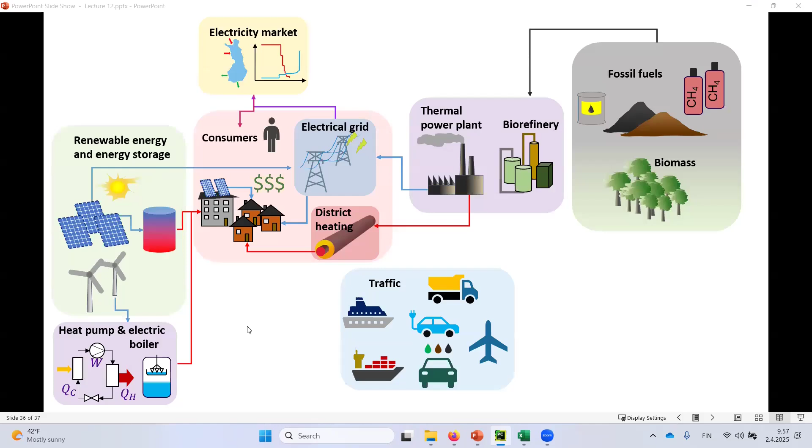Traffic starts to use more and more renewable electricity. We have electrolysis that comes into play with the industry and also with the traffic. So the emerging hydrogen economy, how this biomass can be utilized in industry, and how biorefineries can produce value-added products - for example, hydrothermal liquefaction, which we have been studying here as well.

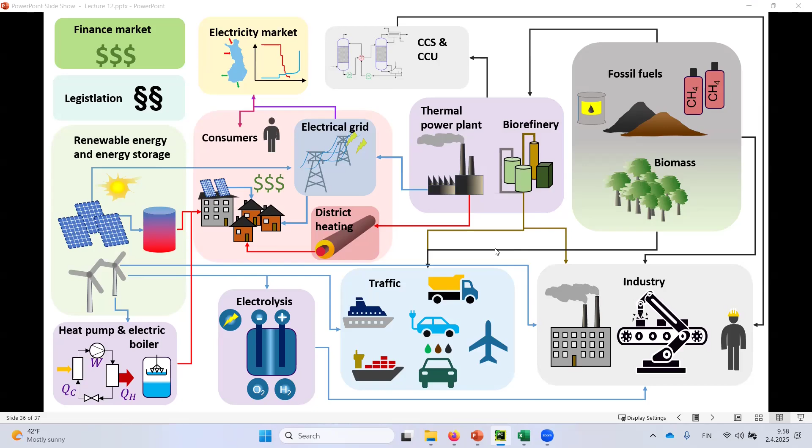And then there's the finance market, decarbonization, and legislation. So there's the mix that you have to take into account in this energy system modeling. And that's why we started from really small systems and advanced to larger and larger systems.

So what this course covered: we had the basics of the energy systems, what elements they contain, and some calculation techniques as well. Then there was the introduction to energy system modeling and scenario creation. We went deeper into consumption modeling, production modeling, and storage modeling. Then we looked at renewable energy sources and how to model them, wind and solar more specifically.

And then there was energy transmission and distribution, so gas networks, electricity networks, and district heating networks. Dynamic modeling of the energy system - what dynamic aspects can be incorporated into these models. And then there was Anna's lectures, insights into modeling large-scale energy system models, with applications and practical examples.

And now I'm trying to conclude this course with this final lecture, so you have the idea of what kind of stakeholders you have to take into account, and what control measures and markets and policies come into play.